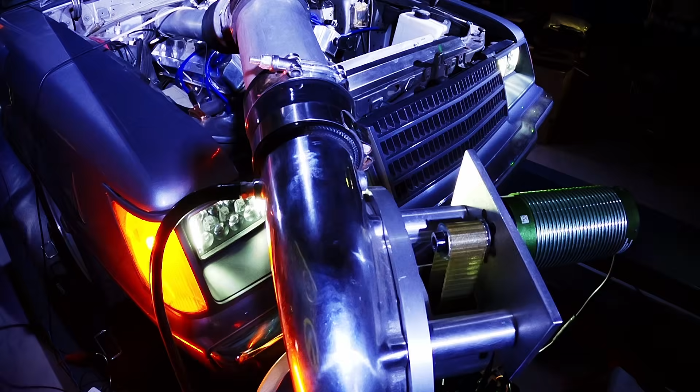The dyno test of the cheaper, easier to assemble electric supercharger was supposed to be really simple. Put it on the car, put the car on the dyno, see how much power it makes. But it got real deep, real fast. Let's look at the data.

If you're watching this, you're my people. And that's because you don't just want to know how much power the electric supercharger made, you want to know why it made what it made.

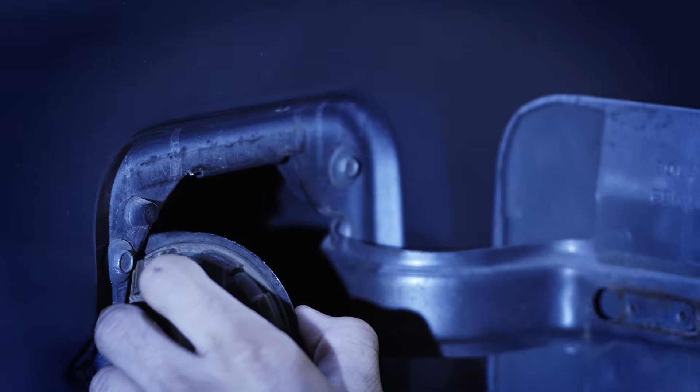But there's a few points I wanted to touch on before we get into the data. First of all, this was run on regular 93 octane pump gas. There was no E85, none of that. Now, I did add some Lucas octane boost just as a safety measure. I've used it before, with the Whipple when it was running 15 pounds. It does work really well and it keeps your engine safe. The only downside is it does turn your plugs orange with the additive package that's in it, but it does work extremely well. I'm not sponsored by them or anything, but I'll put a link in the description below.

There was also no tuning done to the EFI system at all. This was just a preliminary get-to-know-you, let's see how much power it makes, because we've never tested this thing before. And finally, there was no charge cooling of any sort. The meth system wasn't activated, it wasn't even hooked up. There was no air-to-water intercooling, no air-to-air intercooling. These were relatively low pressures. Again, this was just a let's see how much power it makes.

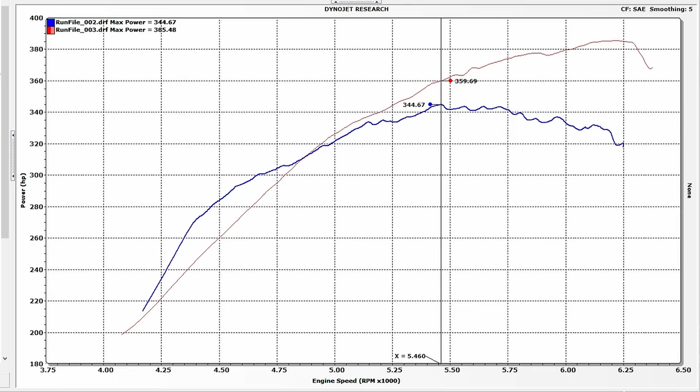Now let's take a look at our baseline naturally aspirated pull. I made mention several times about the whole power glide issue, and that's because it really does come into play. Before we swapped converters, with the exact same engine setup, the thing pulled 385 rear wheel horsepower on raised dyno. After the converter swap, but with no other changes, we lost 40 horsepower. But we did go faster in the quarter mile. So that's part of the voodoo that a converter does, and I feel that's worth mentioning here.

Now, we did pull 344 rear wheel horsepower on raised dyno, and on this day it was a much hotter day, the weather was worse, and we pulled 339.65, as you can see on the dyno graph here.

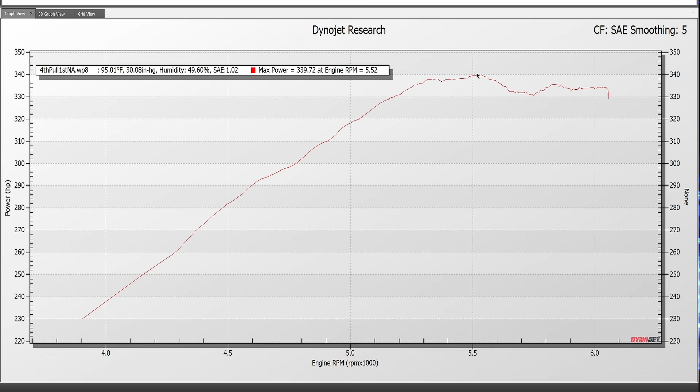Now, peak horsepower came in at 5,500 RPM. That's right about here. It does this little weird dip, and then it kind of comes back up, and that's something we see throughout the pulls. I have no concrete explanation for that, because with the other converter it was peaking at 6,000 RPM. So again, that's just some of the voodoo the converter does, but it's worth mentioning and keeping in mind.

Now, we do have a method where we can figure out the flywheel horsepower. There's a couple of ways we can estimate the flywheel horsepower with losses and all, but the one I like to use because it tends to be the most accurate is brake-specific fuel consumption. So let's take a look at the Megasquirt data log, and this is what our naturally aspirated pull looked like.

The white line in this top graph is RPM. The red line is actually, well, it's listed as boost PSI, but it's manifold pressure. Let me switch that over, for purposes of the naturally aspirated pulls, to MAP, which gives us the same thing but in kilopascals. So 100 kPa would be atmospheric pressure. You can see our max is 100.3. This is sea level. The sea is a mile away from here.

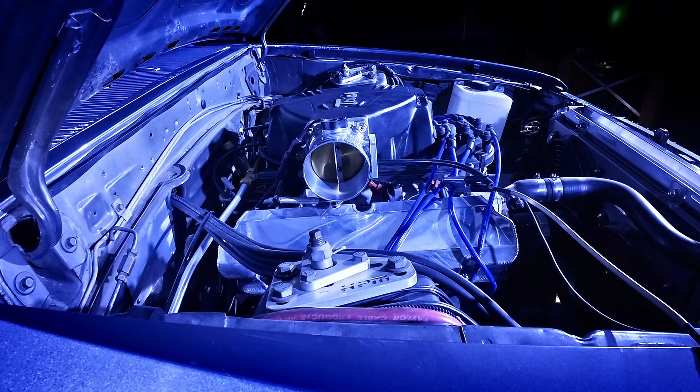So we are pretty much at sea level, so that makes sense. In fact, where this cyan line is right now, that's pretty much where we started. It's 99.2 there, but it kind of goes up and down, like there it hits 100. So we started at that point. Now there is a slight restriction in that intake manifold, even with the gigantic 100mm throttle body. I don't know if it's in the throttle body or right behind it due to the shape of the intake manifold, but there's a little tiny bit of a restriction that we can see when we go all the way up to 6,000-ish RPM. Here at 6,100 RPM, we're down to 99.1. Not huge. I think our lowest number is here, 98.6. But, you know, it's not huge, but it's there.

It's also worth mentioning. Now, let's look at the brake-specific fuel consumption at peak power that was observed at the tires, because that's what matters — that's what you're putting to the ground. So again, it was 5,500 RPM. Let's go to 5,500 RPM on the data log here. And it does vary a bit, so it's somewhere in here. Let's call it here. So our duty cycle in this lower graph, the duty cycle is the white line, is showing 39.1%.

That's a percentage of the maximum duty cycle, which would be 100%. This car has 8 80-pound injectors. So 8 times 80 is 640, so it can flow 640 pounds per hour of fuel. That's a lot, but keep in mind it was designed for forced induction.

It's basically my forced induction rolling test bed, which is why it's only seeing 39%. But we could take that 39% number and that 640 pound per hour maximum fuel flow and figure out the horsepower number. So let's bust open the computer's handy dandy calculator. You take 640, the maximum injector flow, multiply it by 39%, which would be 0.391 if we want to be accurate, and that gives us 250 pounds per hour of fuel flow.

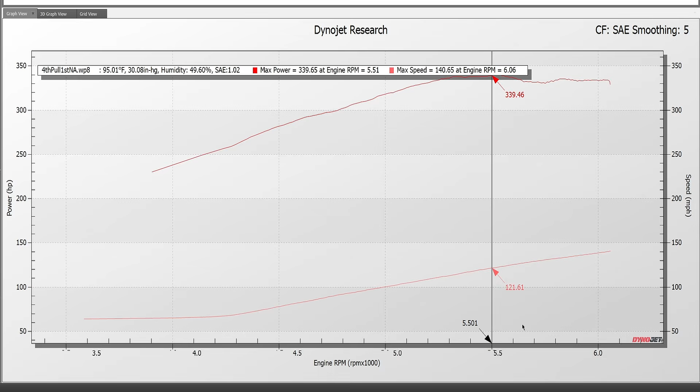But we can see what mile an hour it should have been running at the RPM where it made peak power. So the way we can figure out the amount of converter slip using the dyno software is actually kind of cool and handy. We'll keep engine RPM down on the x-axis, and we know we made peak power at 5,500 RPM, so pretty much right here. On the right-hand side, we can switch it over to mile an hour. So we go to general and speed, and boom, there's your mile an hour. So at 339 rear wheel horsepower, the wheels were spinning at 121.61 miles an hour.

How do we figure out how much torque converter slip there was? Again, slip is not exactly the right word. Well, let's go to an RPM calculator. I like to use Spicer's RPM calculator. It's accurate, handy, and it works really well. So the rear gear ratio is 3.08, the tire height is 25.7 inches, the engine RPM we're interested in is 5,500, and the transmission gear ratio, it's high gear, 1:1. So let's see how fast it should have been going.

136.59 miles an hour. And again, how fast was it going? 121.61. So let's call that 135 versus 121. So there is some slip going on in the converter. In fact, it's 14 miles an hour, give or take, but close enough. So we take 14 miles an hour and divide it by 121.61, and that gives us a slip of 11.5% just in the converter. So we're losing 11.5% power just in the converter, naturally aspirated.

Keep that number in mind because when we start adding boost, the numbers get way bigger. So if you subscribe to the notion of percentage loss, typically in a manual transmission car you'd see about 15% to 17%. So 15% plus approximately 12% gives us a 27% loss factor. So if we take 500 horsepower and multiply it by our 27% loss, which would be 73% power making it to the rear wheels, that gives us 365 horsepower.

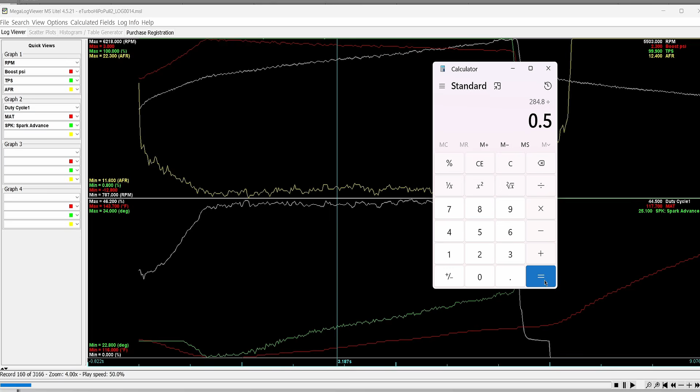So let's go to our handy dandy calculator and take our total fuel flow, which was 640 pounds per hour, multiply it by our duty cycle percentage, which was 0.445. That gives us a fuel flow of 284.8 pounds per hour. Divide that by a BSFC of 0.5, and that gives us 569.6 flywheel horsepower. Now we saw a gain of 68 horsepower at the wheels, but we're only picking up 69.5 horsepower at the flywheel according to the BSFC calculation.

Well, why would that be? Let's take a look at the converter slip numbers. On the right-hand side here, instead of none, we're going to replace this with speed, miles an hour. And at 5,500 RPM, we were going—it's the blue line—112 miles an hour.

Now let me move this out of the way. You see how the blue line kind of starts to pull back, and you get the same weirdness happening here where it comes back and registers 142.88 miles an hour. That's not real data. That's because I did not stop the data acquisition before I let off—I let off first and then stopped the data acquisition on the dyno, and that's what you get. So that's on me. I was nervous, what can I say?

But we were going 112.6 miles an hour as opposed to 121 before. So that's a pretty big difference. So let's go back to Spicer's speed and gears calculator. All this stuff stays the same, and nothing really should have changed, actually. We should be going 136.59, but let's call it 136.

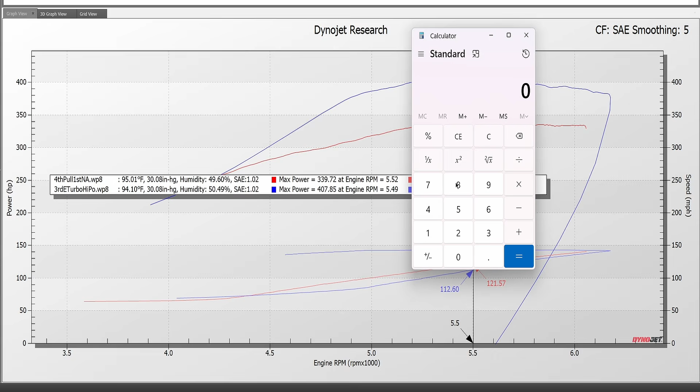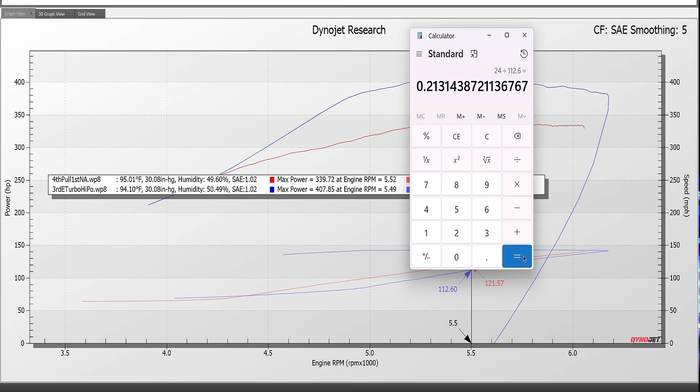And back to the dyno graph—we were going 112.6, so let's go 136 minus 112. That is 136 minus 112. It's actually pretty easy to do in your head, but I'm choosing not to. It's 24 miles an hour. We take 24 and divide it by the speed we were going, which is 112.6, and that gives us 21.3% slip. That's a lot.

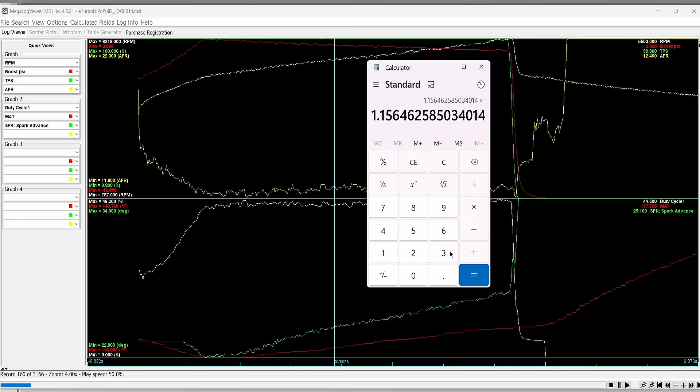Let's look at it from a pressure ratio perspective. We know for a fact that we made 2.3 pounds of boost, right? So if we take 2.3 PSI and divide it by 14.7, that's 0.156. You add a 1 in front of it for atmospheric, and that gives us a pressure ratio of 1.156, which gives us a number to work off of. So if we multiply that times our naturally aspirated number, which is 339 rear wheel horsepower, we get 392. That number is still a little shy of what we actually saw—we saw 408 horsepower at the wheels. What's going on here?

It could be any number of things. It could be that even though the converter slippage is accurate, that number is not definitively accurate. It may not be taking into account the fact that we're shoving more power through the converter, and therefore the converter might be actually multiplying torque at a much higher RPM, giving us more power at the wheels than the losses would normally dictate. In fact, I would say that's probably likely what's going on here.

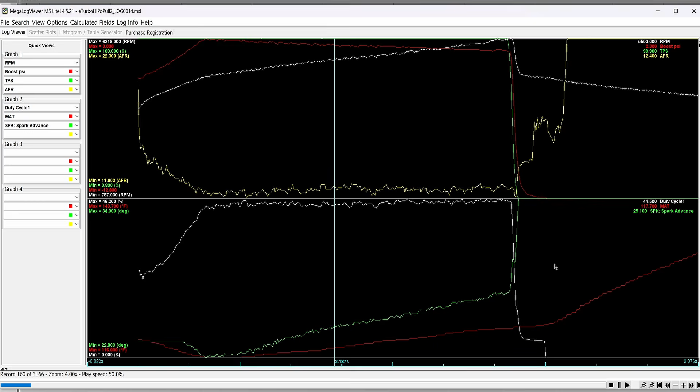There's other factors at play, like for example, when you compress the intake charge, the flame front travels faster, which means you need less spark advance, and we do have less spark advance happening here. We can look at that on the Megasquirt data log here. Our spark advance is the green line on the bottom graph, and at peak power, we were seeing 25 degrees of spark advance. We were probably seeing about 27 naturally aspirated at the same power level, but given the density of the charge is greater, maybe it was seeing effectively a faster flame front and effectively more timing. That could be a thing that's going on here.

But I really think that the biggest factor at play is the torque converter is multiplying torque at a higher RPM because it's just simply seeing more power. But there is one last piece of the puzzle that we haven't looked at for the first electric supercharger pull, and that is the ESC data logs. This is a screenshot from my cell phone because there is no way to data log to a computer, so I had to take a screenshot, and here we are.

But anyway, we're seeing 286.5 amps at 44.4 volts. We were seeing an electrical RPM of 63,290, and electrical RPM translates to mechanical RPM through pole pairs in the motor. And what that means is a Castle motor has 4 poles. That means it has 2 pole pairs. So you would take 63,290 RPM and divide it by 2, and that will give you mechanical RPM.

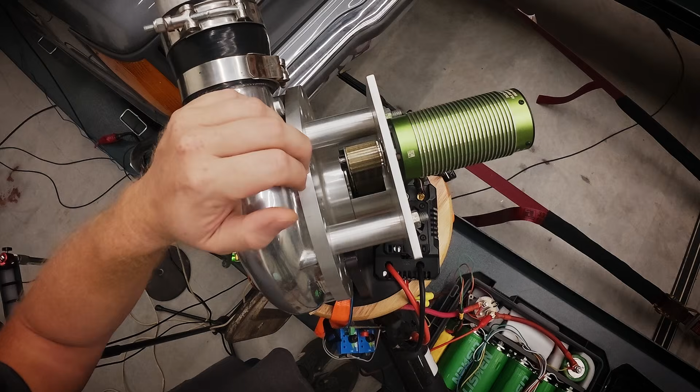So let's just go ahead and do that. Let's see, it was 63,290, and we divide that by 2. The motor was spinning at 31,645 RPM. Now, with the 18-tooth impeller shaft pulley and the 14-tooth motor pulley, there's effectively a pulley reduction happening. 14 teeth on the motor divided by 18 teeth on the impeller gives us a ratio of 0.77 repeating. So we would take that 0.777 repeating, multiply that times our motor speed of 31,645 RPM, and that gives us an impeller speed of...

24,588 RPM. And again, at that impeller speed, we can't really look at the compressor map because of what I said earlier. There is no direct translation, at least no solid enough correlation that I can find yet. We're going to work on that.

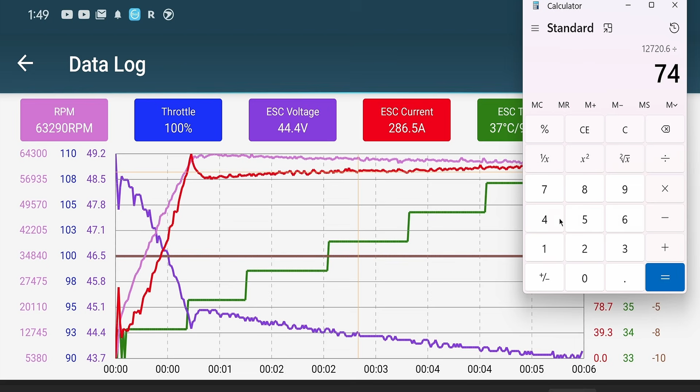We're seeing that we are pulling 44.4 volts. That's the voltage sag because the pack starting voltage is 50.4 volts and a current of 286.5 amps. By the way, the power draw for that is 44.4 times 286.5. That's 12,720 watts divided by 746 watts per horsepower. That's 17 horsepower out of the Castle motor. That's pretty close to its limit. That's about where it should be happy running, which is why I'm glad that the bigger Castle motor and ESC are on their way. So that is the first pulley combination.

Now let's take a look what happened when we really jacked things up and went to the 22-tooth motor pulley. So here is the dyno graph of the 22-tooth motor pulley dyno pull. Now I'm going to use the first pull because after the electric supercharger kicked out, I wasn't sure what happened, but instead of doing the smart thing and checking the data logs, I just assumed it was the AFR safety system and it was running lean, so I richened it up. And it turns out it was not running lean. In fact, it was a little bit rich, and I just made it richer, which is why we lost a little bit of power. But the first pull is the pull that we're going to look at as a result.

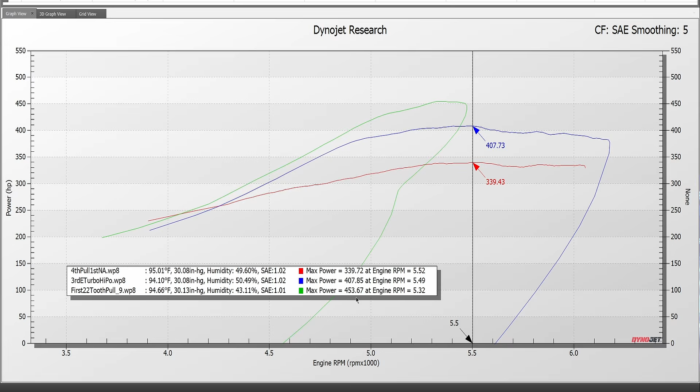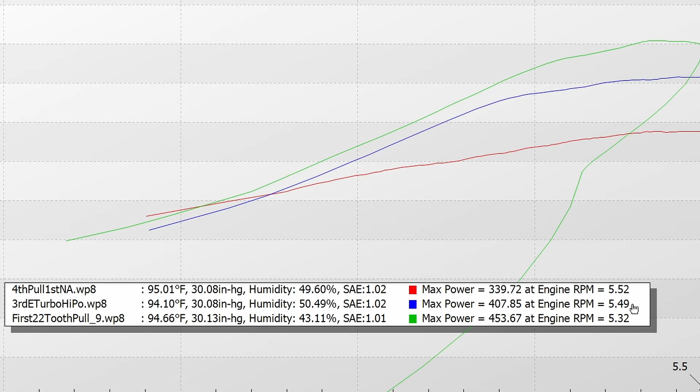So here it is. It's the green trace, and our max power was 453.67 horsepower at 5,320 RPM. Now that's really interesting. So we did not see a huge drop off in RPM between the naturally aspirated pull and the much lower boost electric supercharger pull, but we're starting to get fairly significant. We are seeing a 200 RPM drop now for the peak. And that, again, is because it's making a lot more power.

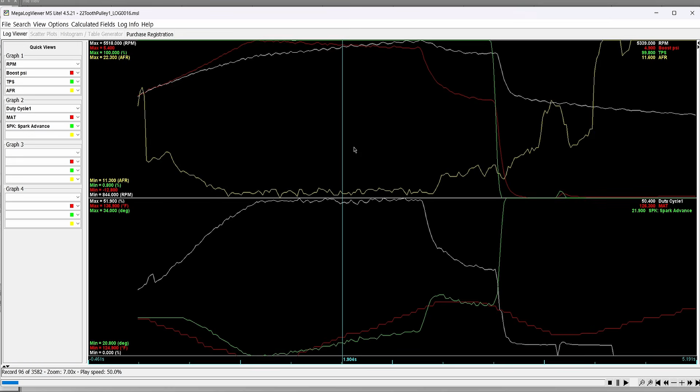And at peak power, which was again just over 5,300 RPM, we're still at 4.9 psi of boost, which is pretty good. Our brake-specific fuel consumption actually went down here a little bit, but fair is fair, so it's 50.4. Let's do our typical calculation and see where that lands us, and see if it's any closer than the lower boost pull was.

So again, we take 640 pounds per hour of flow, multiply it times 0.504. That gives us a fuel flow of 322.56 per hour. Divide that by 0.5, and that gives us a flywheel horsepower figure of 645.12, which I think is actually pretty close.

Future Alex here, coming at you from the editing suite, because somehow I managed to forget to do the pressure ratio calculation. Let's see what the math says we should have pulled rear wheel horsepower wise using the 4.9 psi of boost pressure that we saw. So we take that 4.9 psi, we divide it by atmospheric pressure of 14.7. That gives us 0.333 repeating. Then we add 1 because of the atmospheric pressure that already exists, and that gives us a pressure ratio of 1.33 repeating.

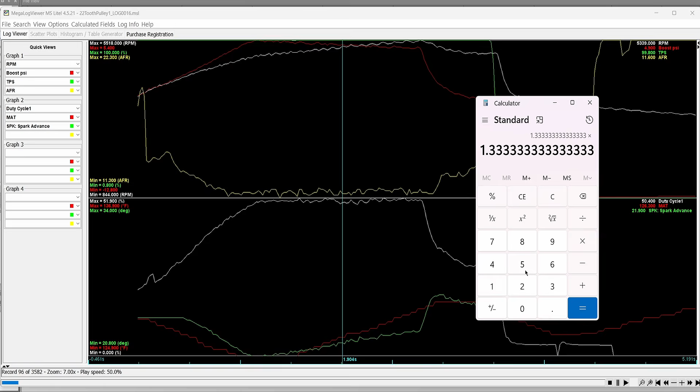We take that number and multiply it by our actual horsepower figure, which naturally aspirated was specifically 339.72 rear wheel horsepower. Let's see what that works out to be. So we take this number, 1.333 repeating, which again is our pressure ratio, we multiply it times 339.72, and that gives us 452.96. Basically 453 horsepower is what the math says we should have pulled.

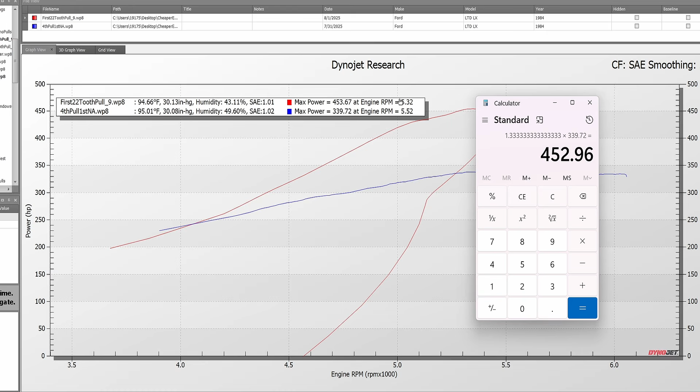And what did we actually pull? 453.67. How do you like them apples? It's actually a little bit better than that because, you know, this happened 200 RPM lower, but I can't believe I forgot this. The math works beautifully on the higher boost pull.

So before we wrap up, let's take a look at the ESC data log, because this is where the mind-blown moment occurred for me. It pulled 664 amps peak, actually a little bit more than that, but that's close enough to peak. And the voltage sagged down to 41.1 volts. So that's 664 times 41.1, that's 27,000 watts, that's 27 kilowatts.

Now that's peak. Let's say it leveled out around 600-ish. Let's be reasonable, and let's say the voltage sag isn't quite that much, so let's call 600 times 42. It's 25,200. Divide that by 746 watts per horsepower. That motor was pumping out almost 34 horsepower.

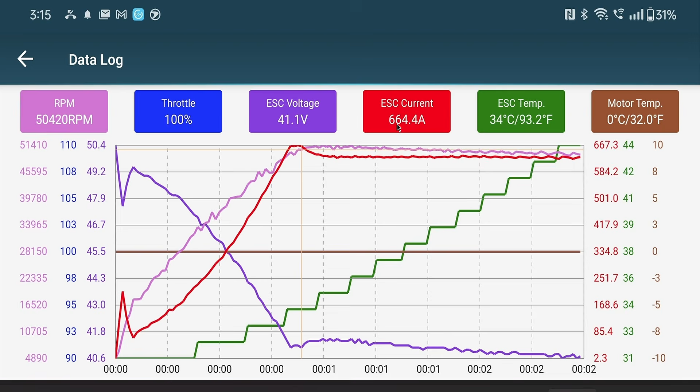Peak, more than that, way too much for that little motor. But this also indicates that the electric supercharger was going way into choke, because that's why the power jumped up by more than double, and the impeller wasn't spinning that much faster.

So if we look at the electrical RPM, it was 50,420, divide that by 2, that gives us 25,210 motor RPM. And the pulley ratio of 22 to 18 teeth, I actually know this off the top of my head, it's 1.22 repeating. So we're going to multiply that by 1.22. We hit over 30,000 impeller RPM, close to 31,000 impeller RPM.

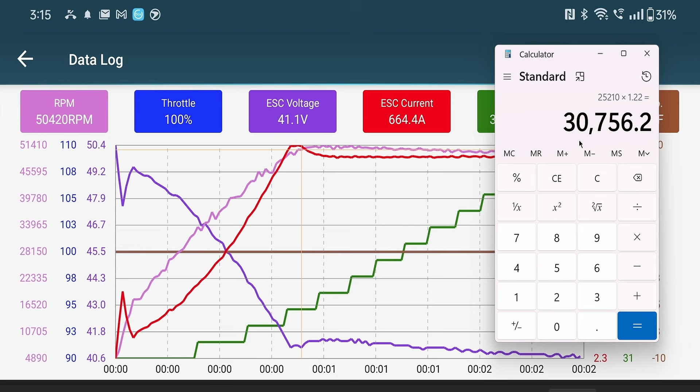Now it's worth noting that the Sledgehammer actually pushes to like 32,000 to 33,000 impeller RPM going down track. So this is pretty darn close to that, but it does appear to be going pretty far into choke. And this is only a little over 5,000, maybe 6,000-ish impeller RPM more than the 14 and 18 tooth setup did. That's some food for thought there.

We're going to have to see what the bigger Castle motor and ESC do. It's got a lower KV, which is RPM per volt rating, so it should run in a much happier RPM band. It's going to be a little bit lower than this, but it should make good, repeatable, and durable power. So definitely stay tuned for that.

This has been kind of a bit of a weird one. This is the first deep data dive where the numbers didn't line up within a couple of horsepower. Things are kind of all over the map, and the only thing I can think of is that the torque converter in the Powerglide is playing havoc with our numbers.

We are going to compare the actual mechanical differences between the compressor side of the P2 supercharger versus the Vortech SI supercharger, because this one does appear to be going into choke a little bit earlier. It also does appear to make a little less boost. Now those are negatives, but the boost does appear to hold on much better than the Sledgehammer does, so that's positive. And that's actually more of a positive overall, because what's happening there is you're putting in less cylinder pressure at peak torque, and peak torque and high cylinder pressure do not go well hand in hand together. I have boxes of pistons that prove that.

So thanks for coming along on this sort of weird deep data dive.